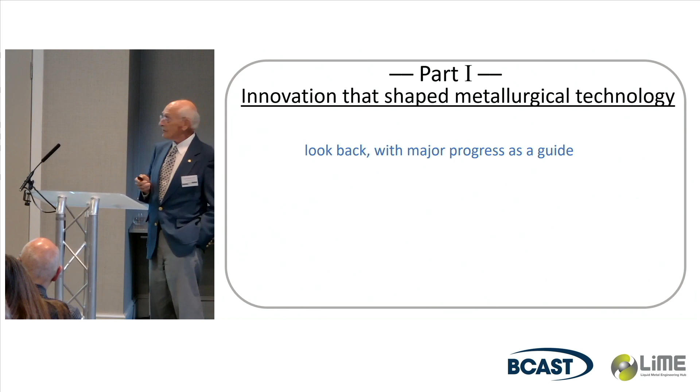I'm going to break the talk into two parts. The first part, I want to show you some innovation in casting technology that truly shaped not only metallurgical technology, but very important industrial sectors in our country. So this is our look back.

What I chose today was directional solidification, so-called DS, which actually led to more than 6 decades of worldwide aircraft development, and more recently, the presence of huge land-based turboelectric generators. Without this particular development, this would not have happened.

This development was considered so significant that ASM, from their Materials Achievement Award, designated DS as one of the 50 greatest advancements in metallurgical history. And that is quite a kudo for such a development.

Even the American Society for Mechanical Engineers used it as a landmark engineering invention, and there aren't too many of them, saying that DS does 3 things: it improves jet engine efficiency, it lowers emission, and extends the interval between engine repairs. Those are the 3 key elements of an aircraft engine that makes it commercially viable and societally acceptable.

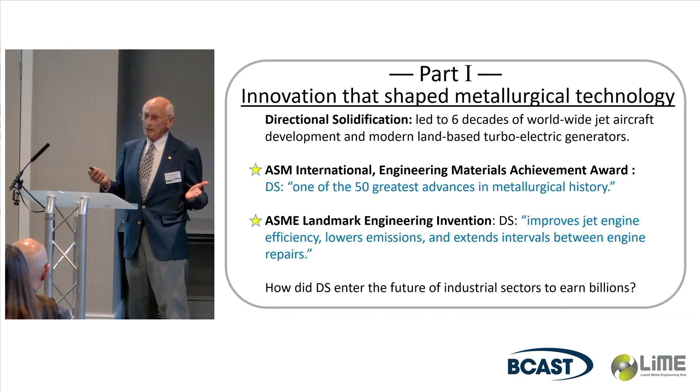So I thought I'd spend a few more minutes explaining how DS really entered our industrial sectors and literally earned billions for the developers. I chose the Pratt & Whitney so-called 10-year miracle. That designation actually came from Professor Chandrashekar from the NIAS in Bangalore.

Professor Chandrashekar studies technology and its impact on society and the military. He's written extensively on these subjects. So this is his designation as the 10-year R&D miracle. This started off with a very basic discovery by Frank VerSnyder.

It was done at the GE Steam Turbine Division. In a nutshell, this DS, as developed by Frank VerSnyder, provides grain boundary orientation control in complex castings. That's what it does. I think it was considered the perfect discovery at the perfect time. One problem: it was not at the perfect place.

In fact, GE was unfortunately unimpressed by VerSnyder's development. VerSnyder was very discouraged, and it took very little encouragement from a fellow by the name of Bud Shank to attract Frank VerSnyder and say, why not join Pratt & Whitney's Advanced Materials R&D Laboratory, where you'll be able to pursue R&D for jet engine metallurgical development. Frank left GE and went over to Pratt & Whitney in Connecticut.

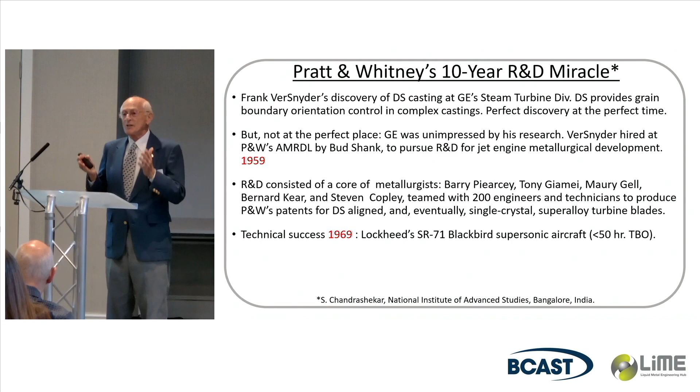Turns out, a few years previously, the Lockheed Skunk Works, the famous American think tank for aircraft, came up with the SR-71, the first supersonic reconnaissance airplane. The problem was the engines, a Mach 3 plus plane. The operating time for those jet engines was somewhere around 30 to 40 hours, then the engine had to be taken down, removed, and replaced. This was obviously unacceptable given the operational necessities of the Blackbird.

However, Lockheed was producing only 1 Blackbird per year, and for Pratt & Whitney, that did not look like a hopeful way to get a return on an investment of some 7 or 8 years with a huge team of personnel involved. But the directionally solidified engines gave many multiples of the 40 or 50 hours of operating time, and the success was demonstrated beautifully in the Blackbird. They were very lucky.

Because just about at the same time, Boeing came out with the 747. While they didn't invite Pratt & Whitney in immediately, as it was a very new concept in this engine, when they started seeing TBO—time between overhaul—approaching 30,000 hours, now about 45,000 hours, that's 5 years of running the engine, that proved the commercial success.

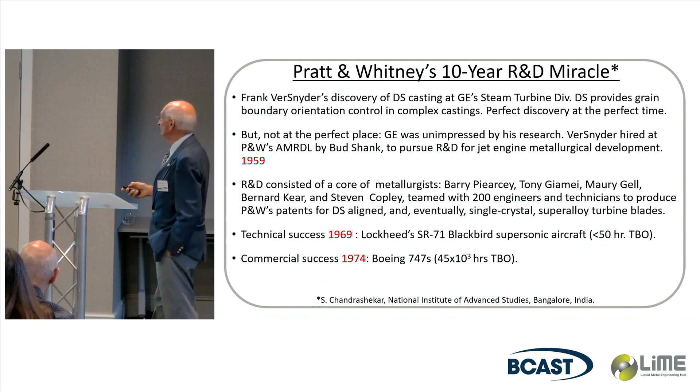I think many of you have seen these pictures, but in case you haven't, I'll quickly show you how this basic discovery moved along. On the right, you'll see the polycrystalline blade, with lots of transverse boundaries through the stress axis, leading to early fatigue and stress rupture at these high temperatures. These blades operate somewhere around 25,000 Gs.

The middle group of blades—oops, what happened here? I think I'm in trouble here. What happened? Yeah, okay, we'll get back there. There we go, I didn't use the right pointer.

This middle blade is the VerSnyder aligned DS. That's still available today. It gives fairly good performance, but to reach the ultimate single crystal form required yet another invention.

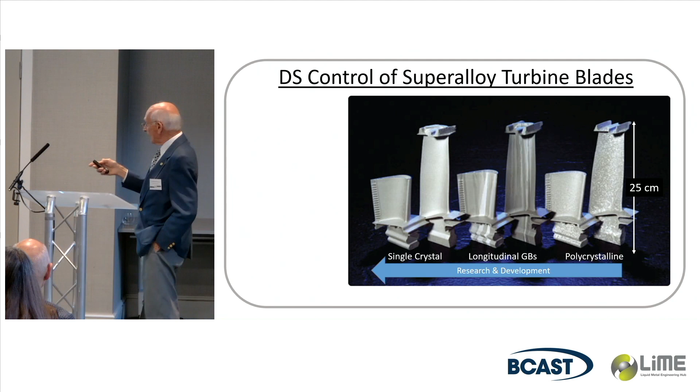This was a very basic idea done by two metallurgists, Tony Giamei and Barry Piearcey. Piearcey observed that when the grains from the tang area of the casting make a right-angle bend, there's a significant reduction in grain density. Tony Giamei said, well, if that right-angle bend reduces the number, what if we make a continuous change of solidification direction using a one-turn helix called the pigtail selector?

Then the pigtail goes into the blade mold, and this device, which was patented in 1971, gives better than 95% single crystallinity to the blades.

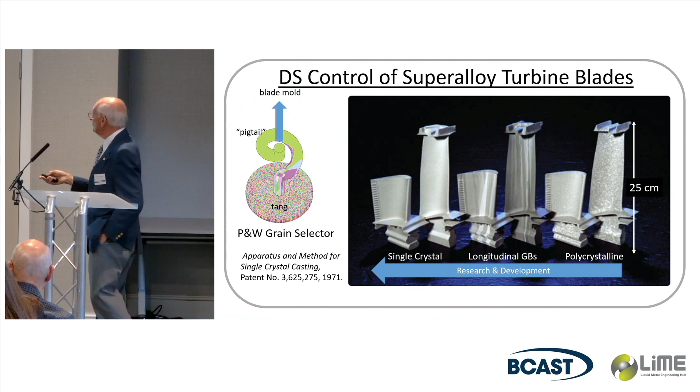So today, this has become a rather specialized and sophisticated form of solidification. Alcoa bought Howmet, which was active in this area back in 2000, and has continuously invested in improving the foundries. Here's a quick glimpse inside the Hampton, Virginia Howmet facility that makes the directionally solidified blades. You can see a number of these lost wax ceramic castings being directionally solidified on a turntable.

You have choices now of DS aligned, which are fairly expensive. In the approved and tested form, these blades run about $12,000 each.

And you can, of course, go from DS aligned to single crystal—they're even more expensive. Then for very special applications, where the airfoil design of the blade gets into some difficult vibrational modes, to eliminate that you can change the elastic moduli by changing the crystallographic orientation. So they have this thing called prescribed orientation, and they will custom make blades of that orientation.

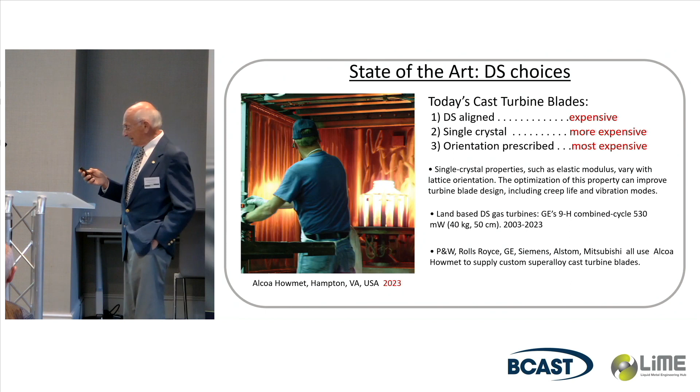Let's move on now. I wanted to mention a couple of recent things we've worked on that I think are solidification phenomena not really well recognized yet, and may affect things in the far future. We'll talk first about observations, because there's been arguments in the field about what's noise-driven and what is deterministic. The interface modeling has proved absolutely essential in what I'm going to show you.

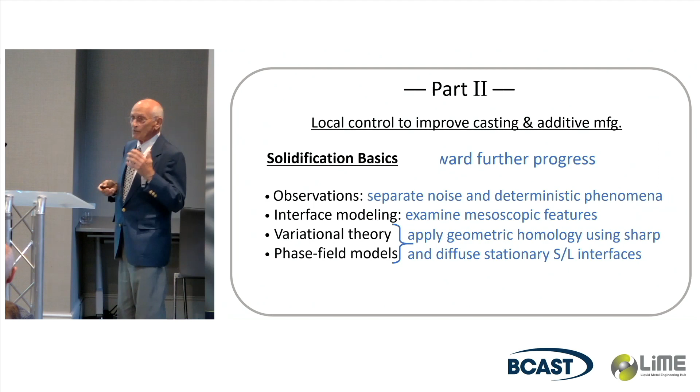We can examine some new mesoscopic features that aren't even thought about in terms of control. What I want to show you today, because I certainly got a big kick out of it, we combined what I'll call... oh my heavens, there's a button here that confuses me a little bit.

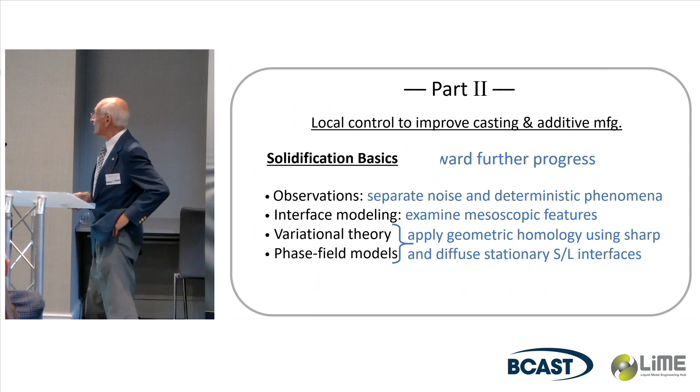We can combine variational theory with phase field models, and we can use what we call geometric homology to learn some very new interesting things about solidification. I'll demonstrate that.

Let me take a moment to show you how I think modern solidification theory sort of evolved. I'd say before 1950 we knew almost nothing about solid-liquid interfaces and the kinds of structures that form there.

It was Bruce Chalmers and his Canadian students who, back in the mid to late 50s, began to use techniques of pulling the solid-liquid interface away from the melt and looking at structures no one knew existed. I call those ex situ solid-liquid structures, and people began to realize there's a lot going on at that interface besides what you might see as ice freezes.

Moving on to the 60s, theories came in to explain those structures, and probably the most prominent is linear morphological stability, which came out in 1963. That was Mullins and Sekerka, and in Russia, Voronkov came out with the idea that noise is present and gets amplified, producing these structures.

Also, Chalmers' book, Principles of Solidification, came out in 1964, and in many people's opinion set the stage for what we call modern solidification science, codifying many ideas that hold true today.

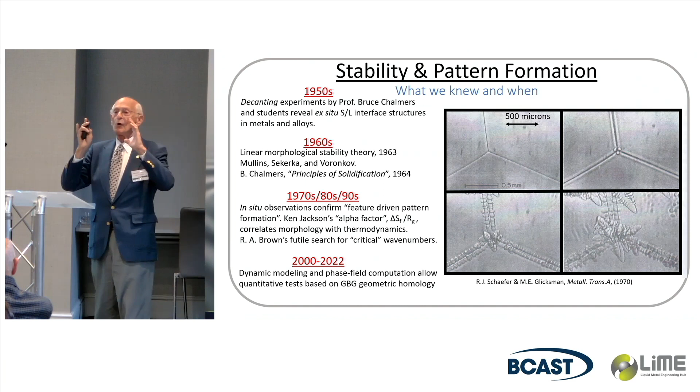In work I published with Bob Schaefer back in 1970, we finally did what we call in situ observation. I pulled these out to show you why these observations did not really coordinate with linear morphological stability.

We're looking through a transparent melt, and we picked the substance through the Jackson alpha factor. This happens to be a body-centered cubic material with a transparent melt, and we're looking down at the plan view of a solid-liquid interface with 3 grains intersecting at a grain boundary groove, about 20 microns wide.

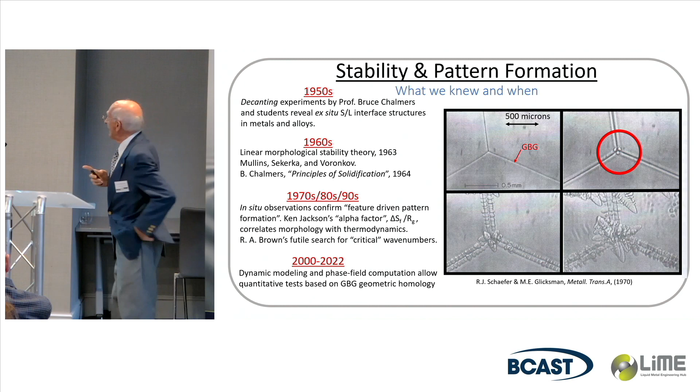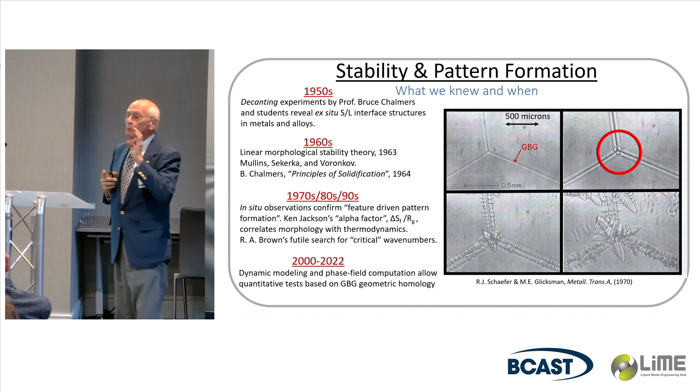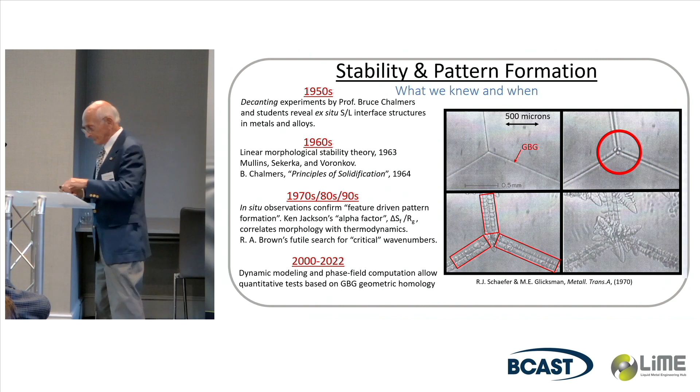Moving on, the interfacial studies — these were Green's functions done by John Lowengrub at UC Irvine for us — showed the reproducibility of these structures. This was a low noise analyzer, and if you took the anisotropy away, typical of metals, we noticed there was extreme pattern sensitivity.

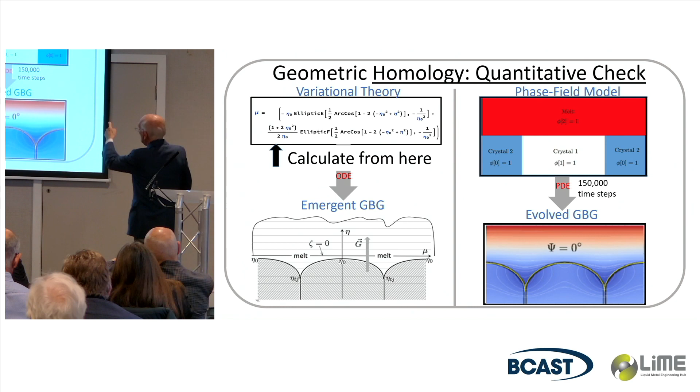You calculate from variational theory everything exactly: the chemical potential, the gradients of the chemical potential, the fluxes that are traveling through the interface under those gradients, which result in either heating or cooling, as I'll show you. From this identical counterpart, we go ahead and measure using essentially post measurements. You actually measure the chemical potential very accurately on the interface.

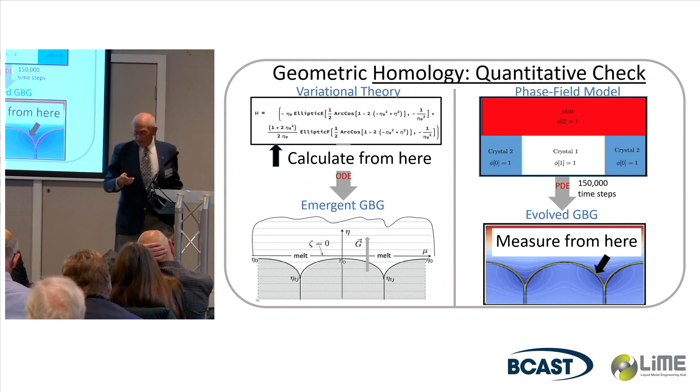And finally, here's the results. The surface Laplacian, which is what we calculate from the variational ones, gives essentially almost exact fits to our measurements. What's very interesting, those blue areas is where cooling is occurring.

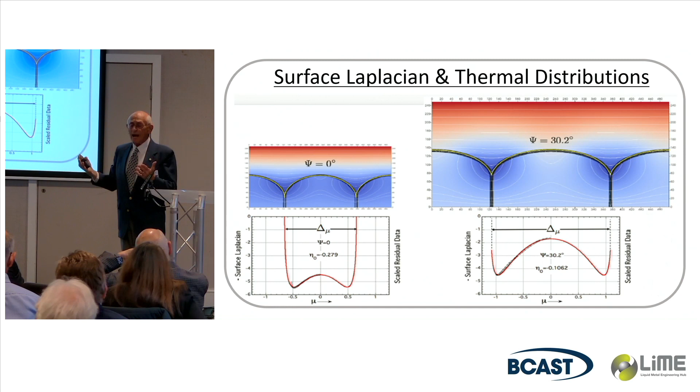This is a stationary interface. And what these results are telling us is there is a mechanism of thermal transport, I think it's a form of thermal diffusion, that goes on in castings that we're not particularly aware of.

And just to check it, look at the vector map of the heat flowing near these boundaries. We have simply a macro gradient, which should give us perfectly straight vectors. You can see that these thermodiffusion effects actually suck the heat in near these boundaries.

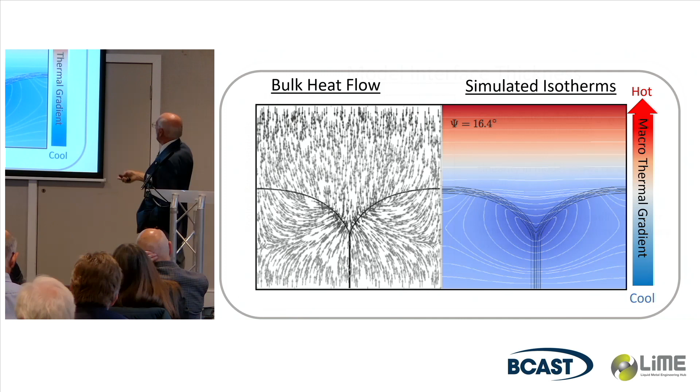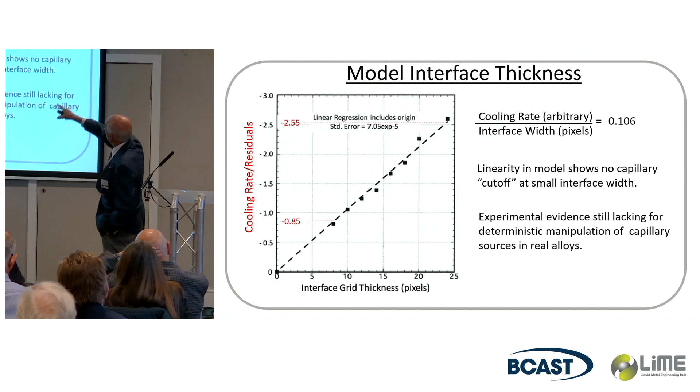To check, final slide, to check to see whether the thickness of the interface is allowing more or less of the currents to flow along it, we measured the cooling rate as these residual potentials as a function of the thickness of the interface, and indeed it's a linear result.

So, here's my conclusion. Please remember the pathways followed toward the future aren't direct. And I'll use one more American quotation: the future ain't what it used to be. And thank you.